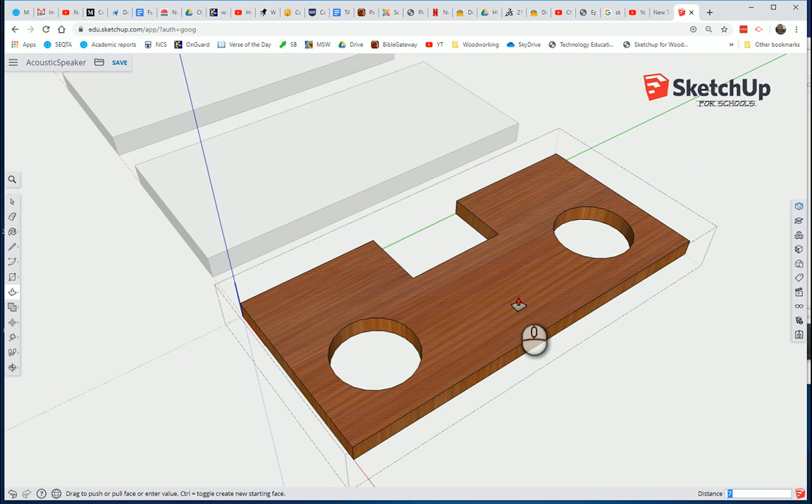So push-pull tool, or P on the keyboard. Click once on the surface, move that down. We're only moving it down a distance of 7 millimeters. Make sure you go down, and if you look in the bottom corner, it will become a negative number when moving down. Simply type 7, press enter, and we are done. I'll press the space bar, click outside that box, and that closes that.

So there we go, that component is edited. All right, we're going to work on this piece now, the phone holder. It's fairly straightforward. We're going to use the geometry we created here to cut this piece.

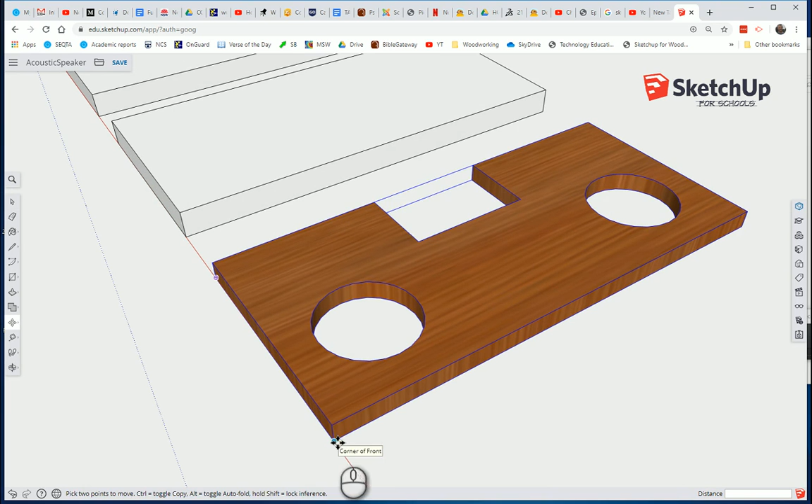Move tool first, or the M button. Now we need to grab our bottom corner, so don't just click anywhere on this shape. Click in the bottom corner, and the little highlight will come up and tell you where you're about to click. I'll click once, move my cursor, and I want it to snap on top of that one, not inside it, not over anywhere on it, but to match up the corners, and click.

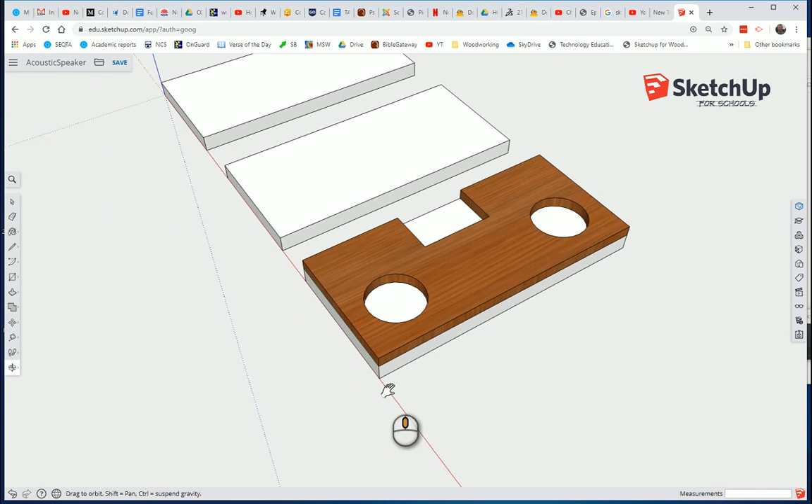I'll move my screen down and zoom in a bit. Spacebar, go back to the select tool, or you can click it here. All right, we're going to triple click this bottom piece, the bottom part, so that the whole thing is selected.

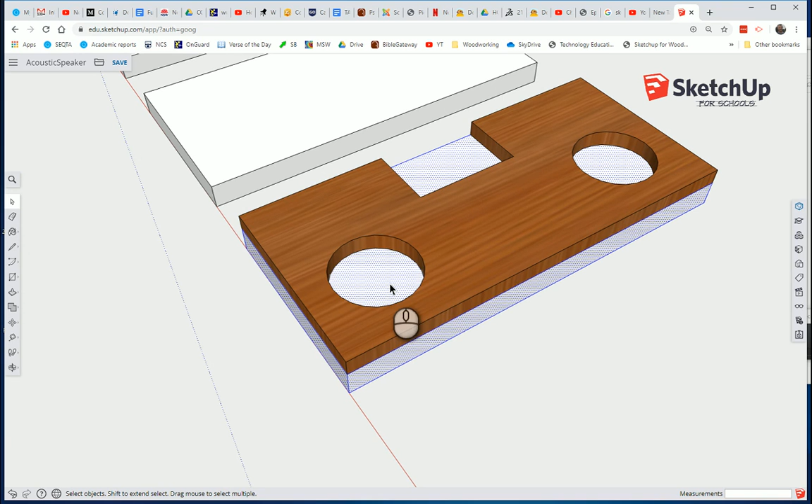We're going to right click on it, not the top piece, and choose intersect faces with model. So triple click, then right click, intersect faces with model, and click that. Now back to the move tool, and you'll see what we just did.

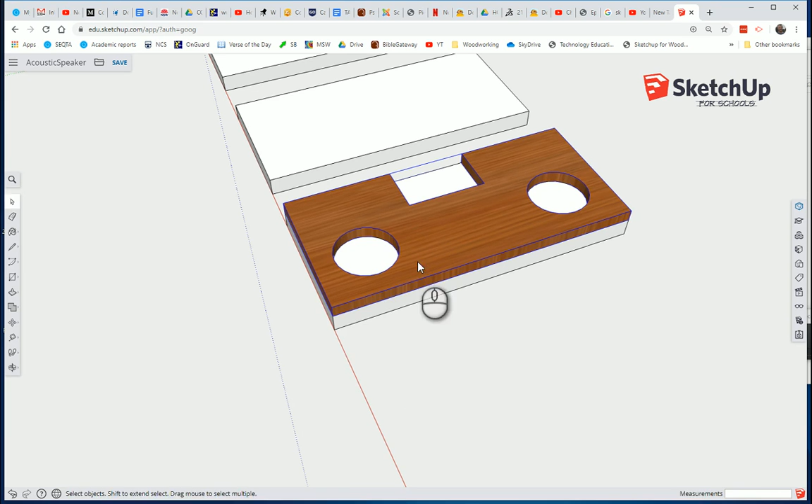I'm going to press M on the keyboard, grab that bottom corner. Whoops, if you grab the wrong piece like I just did, press the space bar, it'll deselect. My suggestion is to click that one first. Now I'll press M, click, and move that away. You can see what that intersect faces command did to that piece. Click to place that.

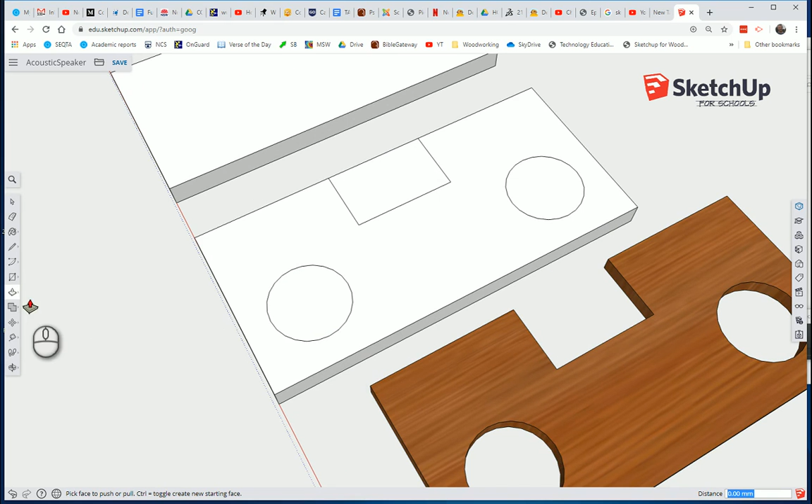It's a simple matter of push-pulling these parts through. Push-pull tool, P on the keyboard. Remember, you could have clicked it over here. We're going to pull these down to the bottom edge. Click once, put the cursor at the bottom edge, click once, put the cursor on the bottom edge, and click again. Click once, cursor on the bottom edge, click again.

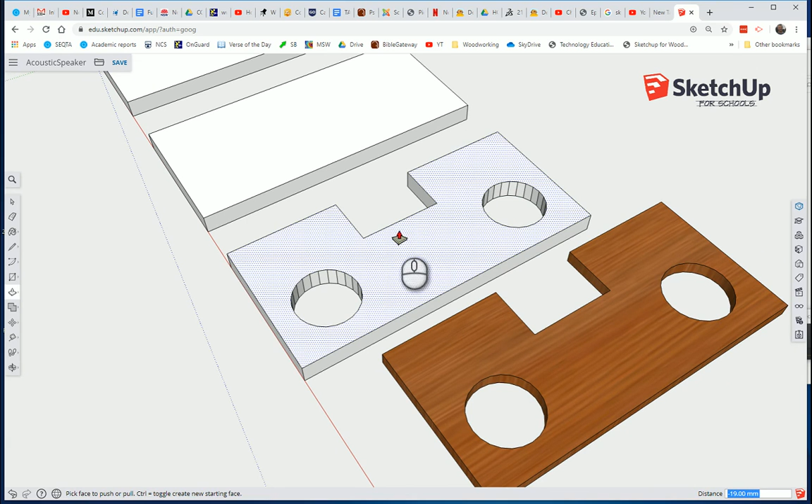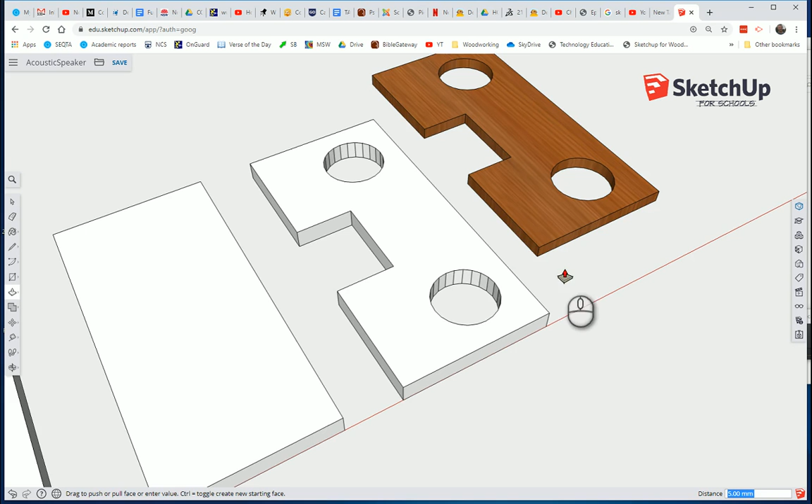Nearly done. Our phone holder, this little section here, I'll press the space bar, go back to the cursor. This little section in the phone holder is 5 millimeters lower, so we can easily edit that. I'm just going to change my view so I can see that little surface. Push-pull tool, click on that surface, move my cursor that way, and type 5. Press enter, so that just reduced that by 5 millimeters. Change my view back.

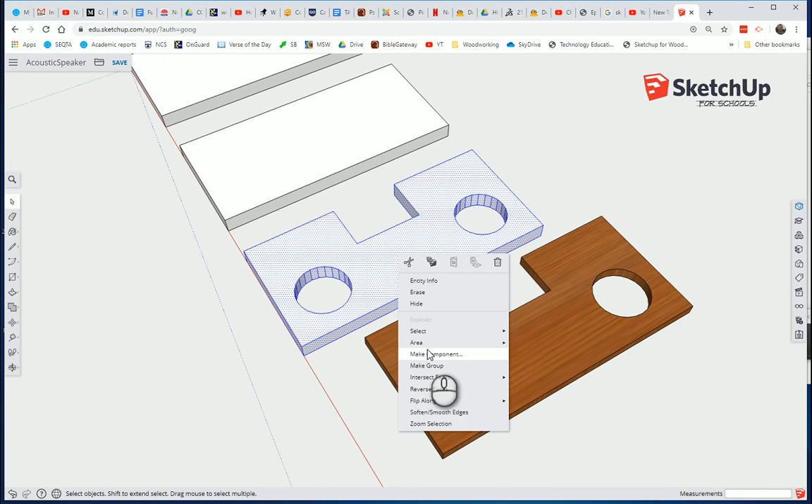Select tool. We're going to make this a component. You've done that before, hopefully you remember to triple click, then right click, make component. This one's called phone holder. Click OK. I'm going to add a color to that,

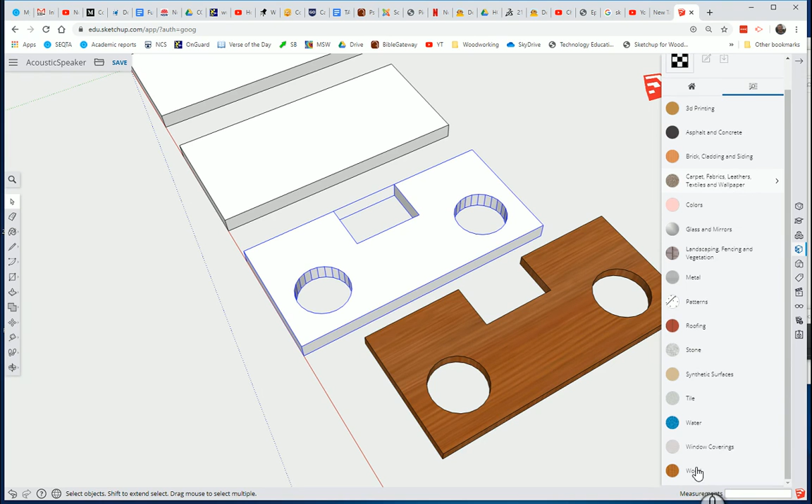which is materials. Get rid of that one, we don't need that. It should be the materials tab here. Click the browse button. I'm going to go down to the bottom to wood. What is this? No. I'm going to choose one of the light colors. This one looks okay. Click and we'll apply that to that piece.

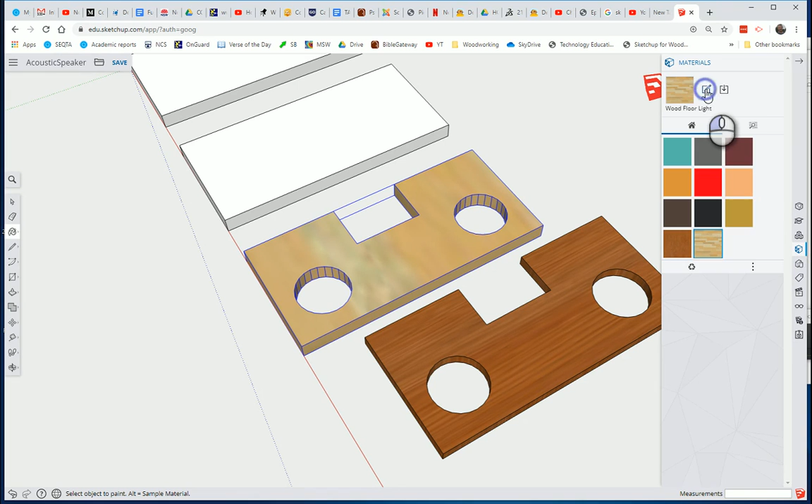Again, that doesn't look quite right, so I'm going to edit that surface. Go back to the in-model, the little picture of the house. It's selected already, I'm going to have to click that first, then click edit. Why is it doing that? Well, it appears I can't edit this, it's acting in a really strange way. No, sorry, I can't edit it. Hopefully you can edit it. The first video, the end of it, showed you how you can edit that surface to make it look a little better.

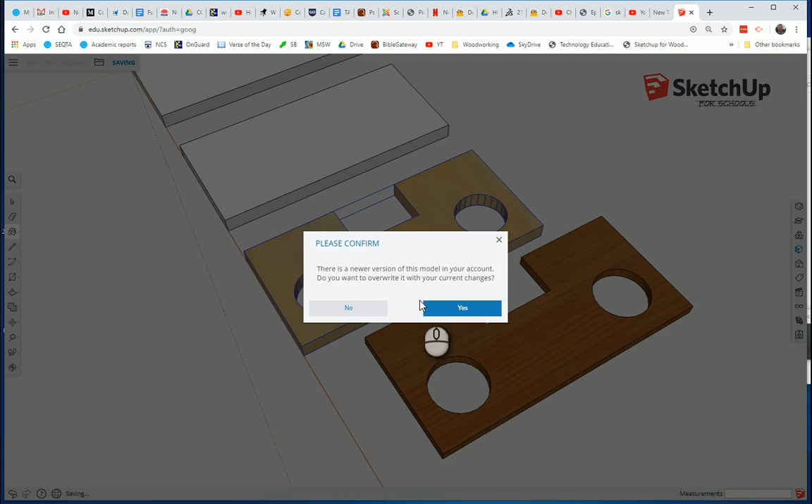That's the end of this video. I need to click the save button. That's important, always remember to save. Saving, and we're done. See you in the next video.